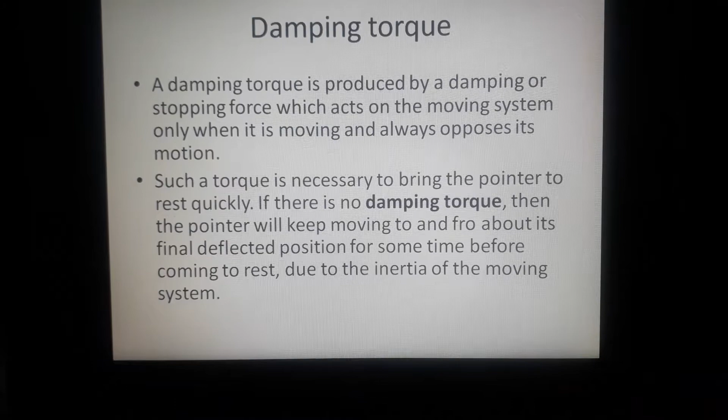This damping torque acts only when pointer is in motion and always opposes the movement. The position of the pointer when stationary is therefore not affected by damping torque. Once it comes to the rest position, no damping torque is produced. The degree of damping decides the behavior of the moving system.

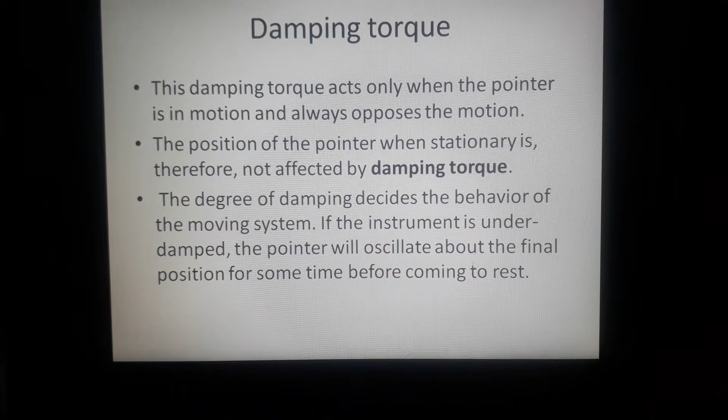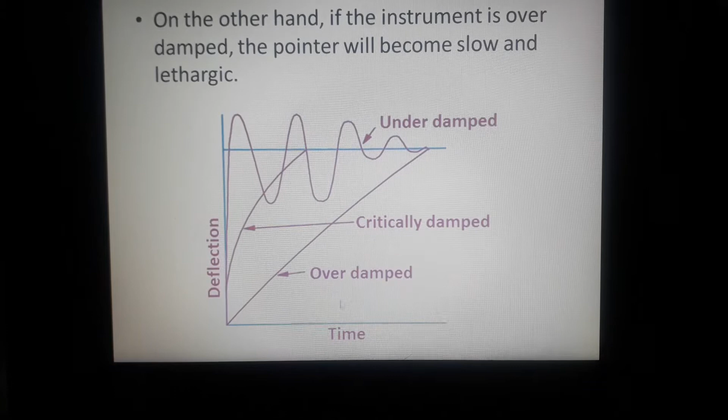If my instrument is under damped, the pointer will oscillate about the final position for some time before coming to rest. See, my pointer is going to oscillate before it comes to rest. And if it is over damping, the pointer will become slow and lethargic. This is slow and lethargic. And this is my critical damping.

If the degree of damping is adjusted to such a value that the pointer comes up to the correct reading quickly without oscillation about it, the instrument is called critically damped. So critical damping is this one. It comes to the rest position very quickly.

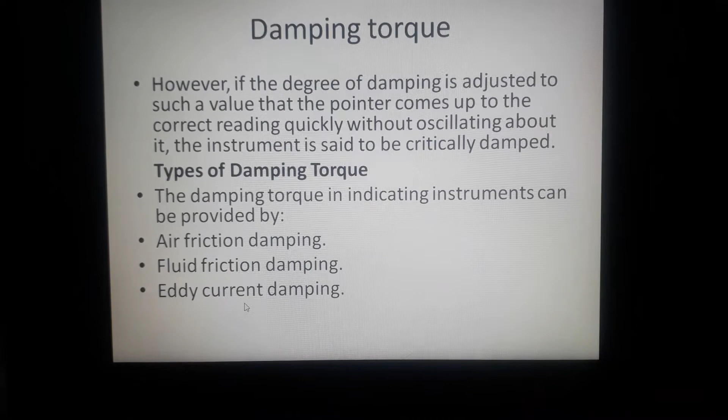A cushion action of the air on the piston damps out any tendency of the pointer to oscillate about the final deflected position. This air chamber will try to stop this pointer. This method is not favored these days, and figure b is followed.

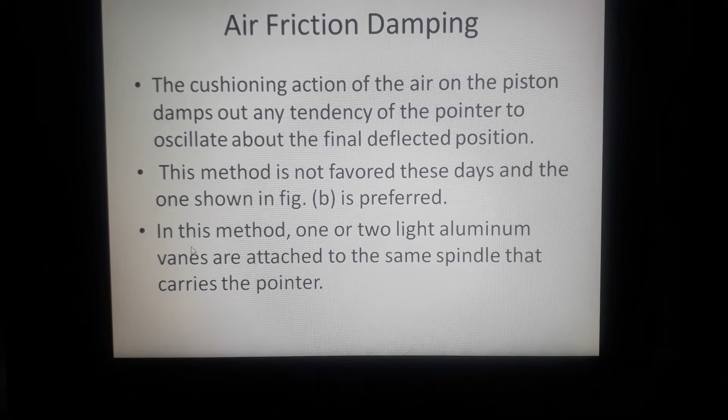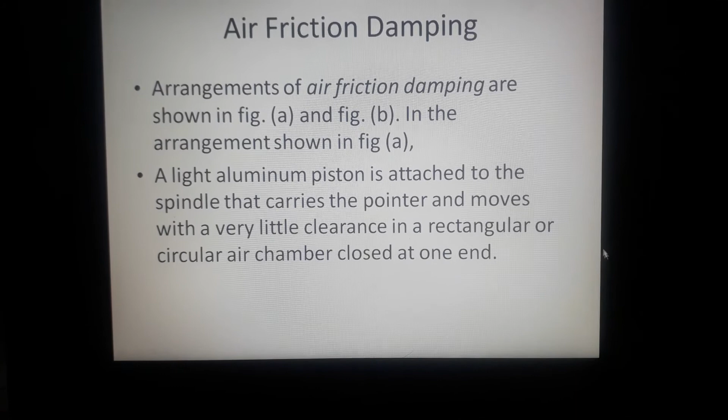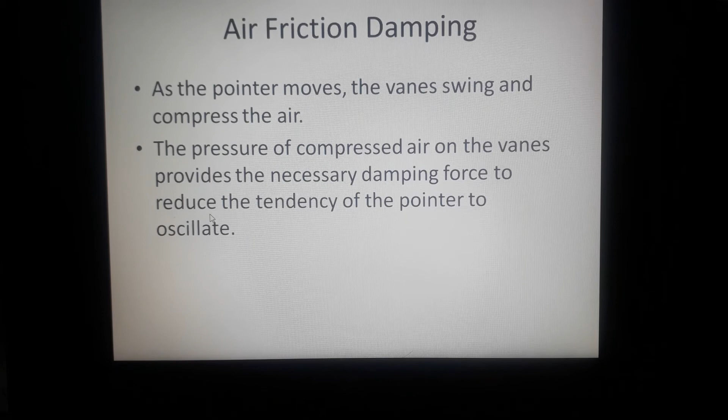One or two light aluminum vanes are attached to the same spindle that carries the pointer. As the pointer moves, the vane swings and compresses the air. So my vane will try to compress the air with respect to the pointer. The pressure of the compressed air on the vane provides the necessary damping for that particular pointer. This is regarding your air friction damping.